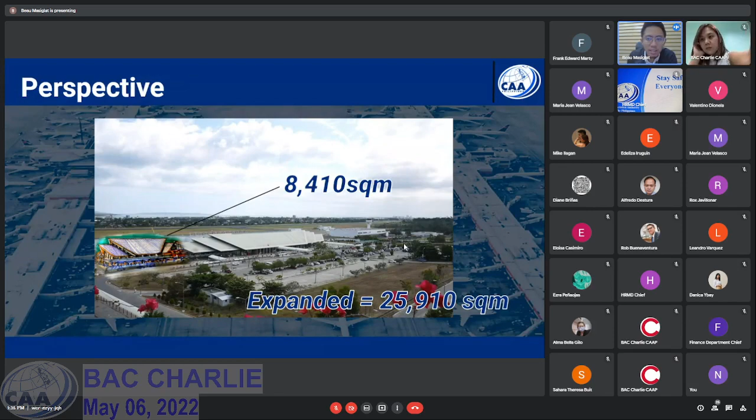This is a DOTR downloaded project. An overview of this project and the mock-up of the PTB expansion. Shown on screen is the existing passenger terminal building of Davao International Airport with an existing floor area of 17,500 square meters. The project will be located there, shown on screen, around 8,410 square meters. Again, highlighted on the screen is the area where the project will be constructed.

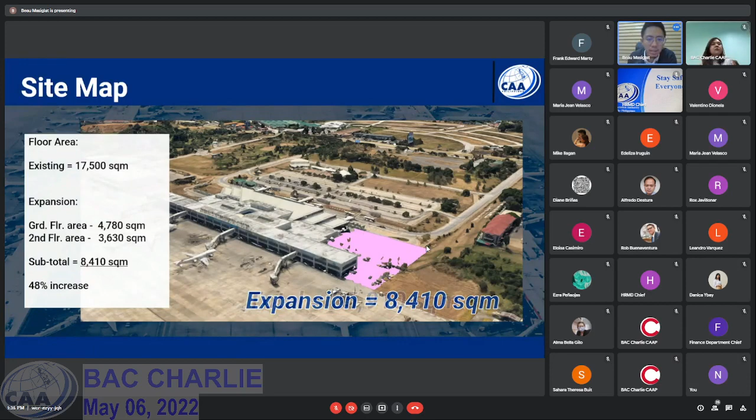This is the perspective view of the project. The proposed area is the vacant lot as shown on screen, and that would be the exterior of the expanded passenger terminal building. The expansion will be dedicated to international flights with an estimated seating capacity in the pre-departure area of 700 passengers, while the existing PTB will be dedicated to domestic flights.

This project already has an allotment from the DOTR in the amount of 700 million pesos, as shown in the letter advice of allotment release dated December 18, 2018. So the contract amount for this project is 699,549,324 pesos and 15 centavos. The plans and drawings for this project are as follows.

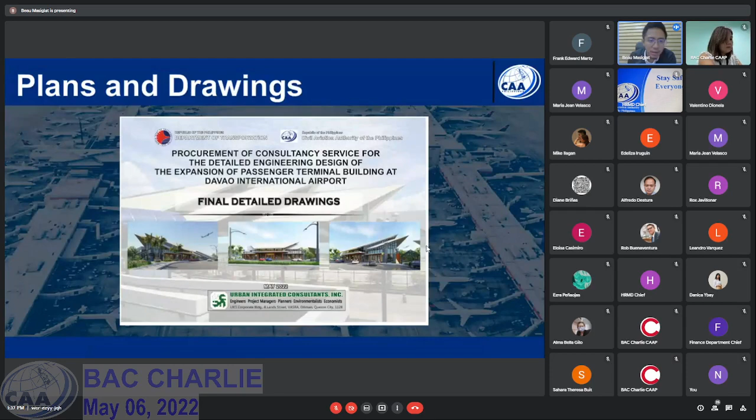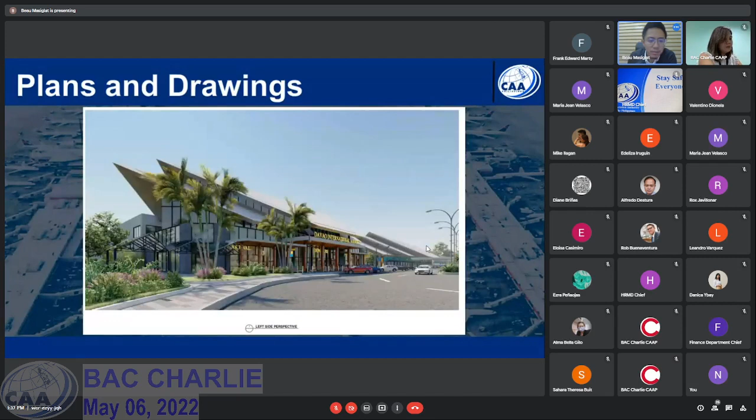Mr. Chair, this would be the interior of the expanded passenger terminal building.

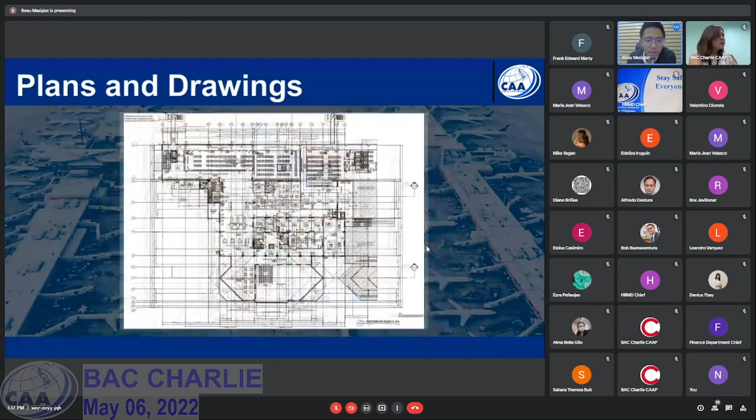For the scope of work, the project profile, the minimum requirements for this project, the technical personnel required would be 1 project manager, 1 project engineer, 1 material engineer, 1 electrical engineer, 1 mechanical engineer, 3 civil engineers, 1 architect, 1 sanitary engineer, 1 surveyor, 1 safety officer, and 1 nurse.

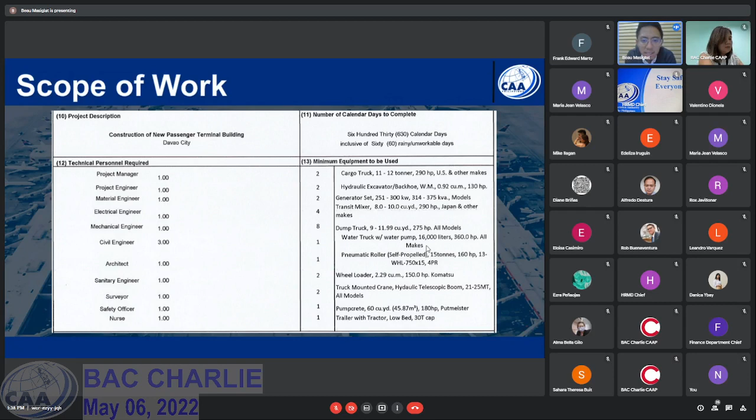The minimum equipment needed for this would be 2 cargo trucks, 2 hydraulic excavators or backhoes, 2 generator sets, 4 transit mixers, 8 dump trucks, 1 water truck with water pump, one pneumatic roller, two wheel loaders, two truck-mounted cranes, one pumpcrete, and one trailer with tractor. The number of calendar days to complete the project is 630 calendar days, inclusive of 60 rainy or unworkable days.

For the scope of work, it would be mobilization, demobilization, general requirements for civil works, structural works, architectural works, mechanical and fire protection, sanitary works, electrical works, telecommunication, and special equipment, which comprises 100% of the direct total cost.

Mr. Chair, I will be detailing the telecommunications and special equipment for this project, considering that all the other scope of work are the usual requirements for the construction of a new building.

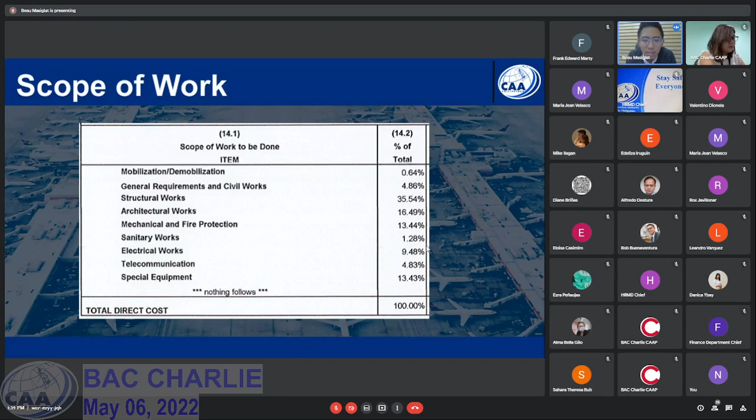For the telecommunication, the project would already include the PABX telephone system, which would need to be complete with the installation, delivery, and all the accessories needed, as shown on screen. It would also include a cable TV system and a local area network. A Wi-Fi system as well is required for this project, an uninterruptible power supply, public address system, and a master clock system. Also included is the IP CCTV system, fire detection alarm system, and flight information display system.

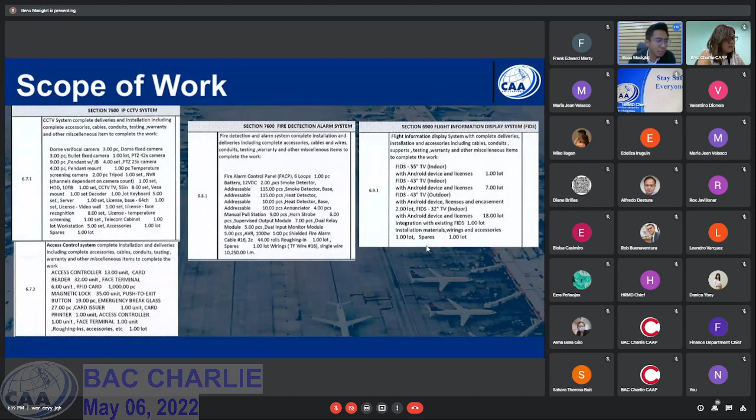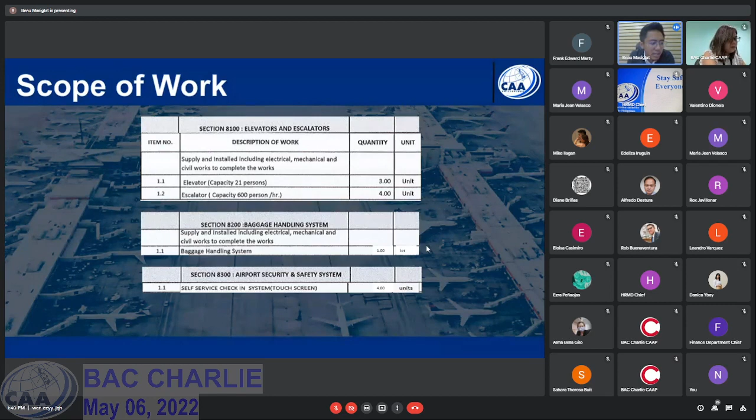For the other special equipment needed for this project, elevators and escalators, which would also already include the service elevator, a baggage handling system, and a self-service check-in system. The PCAB license needed is Large B license, category AAA for building and industrial plant.

For the eligible bidders, the bidder must have experience having completed a single largest contract similar to this project, equivalent to at least 50% of the ABC. Subcontracting is not allowed.

For the certificate of site inspection, it must be signed by Engineer Rex Obsena, Airport Manager of Davao International Airport. It should also include a copy of the company ID of the person who conducted the site inspection, a copy of the airport facility visitor's logbook with the entry name of the person who conducted the site inspection, and a picture of the proposed site, including the personnel who conducted the site inspection, together with the airport manager or officer in charge or his duly authorized representative.

For the purpose of this project, a similar contract would refer to building, construction, improvement, rehabilitation, or repair. Now, the key personnel needed for this project would need to have an experience of minimum years shown on screen. General experience would be 5 years in general engineering, while relevant experience would be 3 years in building construction, improvement, rehabilitation, and repair.

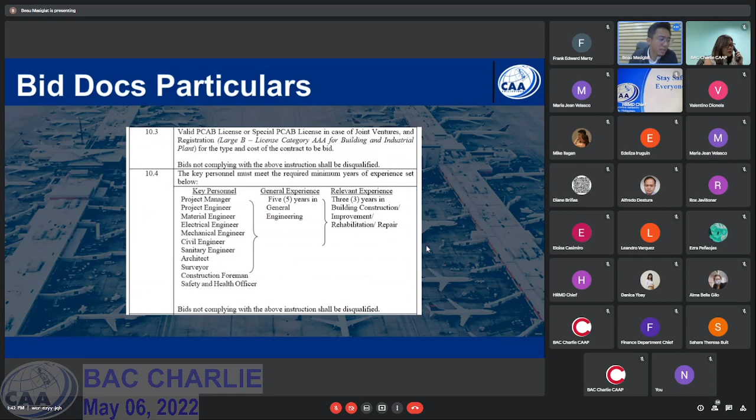Next, upon signing of the contract agreement, the winning bidder shall also submit a construction schedule, bar chart and S-curve, PERT CPM network diagram, manpower schedule, construction methods, and equipment utilization schedule.

No down payment is allowed for this project, and there would be a 2% withholding, with the amount of 2% of the contract price withheld if the winning bidder fails to produce the as-built drawings.

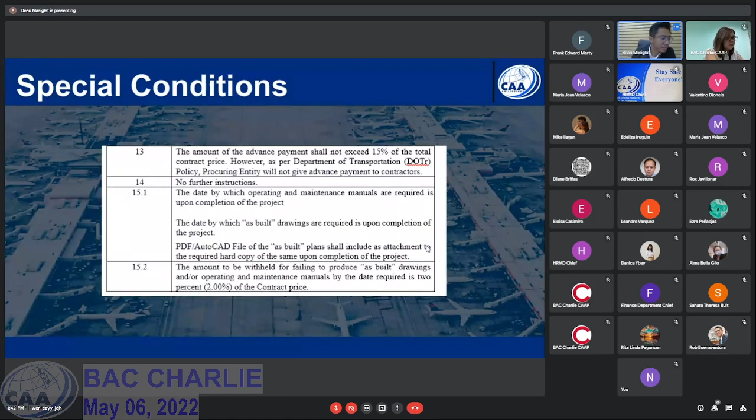Mr. Chair, the action requested from this committee is for the project entitled Expansion of Davao International Airport Passenger Terminal Building in the amount of 699,549,324 pesos and 15 cents, to be procured through public bidding.

Okay, thank you Attorney Beau. So at this juncture, perhaps if there are any questions from our members, if there is none, perhaps we can ask for a motion. This is for posting, Attorney Beau, right? Yes, Mr. Chair.

Members, please. To the chair. Yes, Ma'am Joyce. Yes sir, I move for the posting for the procurement of the project entitled Expansion of Davao International Airport Passenger Terminal Building through public bidding. Thank you.

Second the motion, Mr. Chair. Thank you, Ma'am Joyce. Thank you, Ma'am Vani. So there has been a move for this project, Expansion of Davao International Airport Passenger Terminal Building, to be posted and procured through public bidding, and it was duly seconded. So the motion is carried.

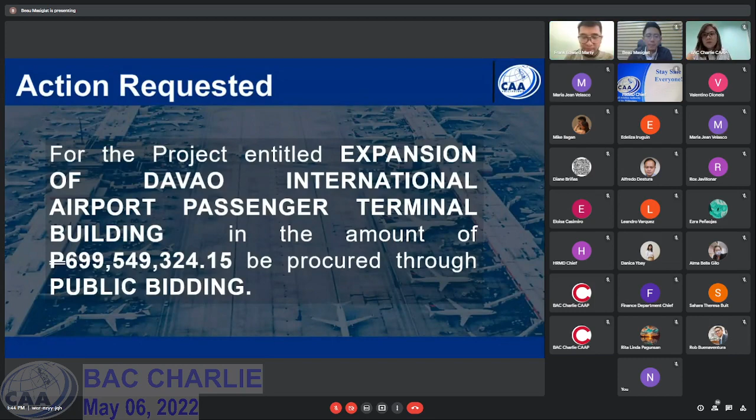Thank you. So the next item of today's meeting is the presentation of the post-qualification report for the project entitled Asphalt Overlay of Runway and Runway Markings for the Tacloban Airport Development Project.

For the Tacloban Airport Development Project. So I think there has been an error for this notice. This is actually for the Calbayog Airport Development Project, for the asphalt overlay for the Calbayog Airport Development Project.

Secretariat: We apologize, sir, but yes, this is to manifest that there is an error in the agenda for the third agenda item, sir. It is supposed to be for Calbayog, sir. We'll make the necessary rectification, sir, and we'll have another notice of meeting, the corrected one, signed, sir.

We apologize. Yes, please do so, as we need to attach the notice of meeting in the documentation of this project. So for this agenda item, I will be presenting the outcome of the post-qualification evaluation conducted by the technical working group.

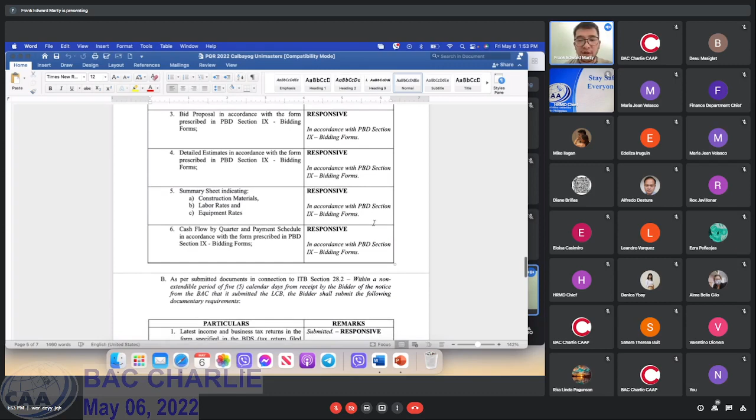For the bill of quantities, they submitted the BOQ in accordance with the bidding forms of the project, so it is responsive. For the bid proposal, it is also in accordance with the bidding forms, so it is responsive. Detailed estimates, the submission is in accordance with Section 9 of the bidding form, so it is responsive.

For the summary sheets indicating materials, labor rates, and equipment rates, all the submitted forms are in accordance with the bidding forms, so it is responsive. Cash flow by quarter and payment schedule, the submission is also responsive. They submitted a cash flow by quarter which is in accordance with the bidding forms.

The technical working group conducted a site inspection and validation at Tacloban City, the office of Unimaster's Conglomeration, and we also inspected the equipment pledged for the project, as well as the ongoing projects of Unimaster's Conglomeration.

So they also submitted the post-qualification documents, and here are the evaluation of the submitted documents.

For the latest income tax or business tax, they submitted the business tax period for January 2022, stamped received by BIR 18 February 2022, so this is responsive.

For the other appropriate licenses, they submitted the PhilGEPS Certificate of Registration, PCAB license, SEC registration, mayor's permits, and tax clearance. The submissions are current, valid, and these are the updated documents as submitted, so these are responsive submissions.